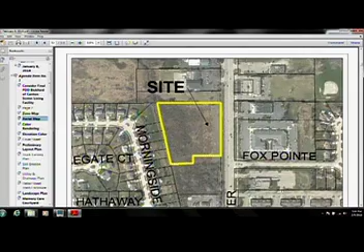The use is complementary to the medical uses on the Canton Center corridor and provides a use which is underserved in the Canton market. We discussed some of the traffic issues at the last public hearing. Traffic generation is projected to be less than typical office or commercial uses that can be developed on the site. This is the 5-lane section of Canton Center. The county, when they get a driveway permit application, will take a look at the geometrics for the driveway orientation and layout of the drive approach.

The building is a single-story brick and stone building with some siding, high-end architectural finishes. The project sponsors provided a brochure to you, which gives you an idea of what the building will look like in color, and some interior renderings of what the rooms will look like in the assisted living facility. It will be very nice, a good fit for Canton, serving our aging population and their families as our demographics change. Mr. Eby is here today to answer any questions on the final plan development, but otherwise it's pretty similar to what you saw back in October, November of last year, and staff would recommend approval of the final PDD.

Thank you, Jeff. I noticed they even let us know what the bus looks like. It's quite extensive.

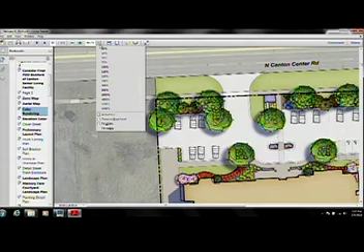Along the northern boundary of the property there is what I'll call a conservation area, a designated wetland from a previous development that will perpetually remain green. So we have that 50-foot green buffer, which will make it seem more open. Also, to the rear of the property, we have Fellows Creek with its extensive vegetation, which will help serve as screening.

There is an emergency lane that was required by the fire department to access all sides of the building. On the next page, I have blocked out where the subsurface detention is.

That was a question brought up at the last meeting—what is subsurface detention—because it's a new way of managing stormwater runoff. You can see the area of our parking lot where that subsurface detention will be and how it will discharge into Fellows Creek.

On the next page you see illustrations showing what the stormwater detention basins look like. They're basically large pipes that store the water temporarily and then slowly release it at a controlled rate into the creek.

On the next page, we also have the end sections where it will discharge into Fellows Creek. We also show the vortex separator, which helps remove sediment and debris—it's a method of treating the water before release.

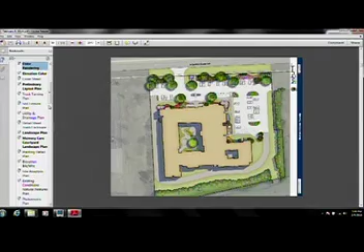The next page is a picture of our typical bus. We call it Howie. One of the questions—what's it called? It was an acronym for happiness, I can't remember what it stands for right now. You caught me on that.

One of the questions that came up last time was whether we would have an impact on the transportation system provided for many of your seniors. We addressed that—this is about a 15-passenger bus that is handicapped accessible, with lift ramps and so forth.

The next page is just a really neat shot—it's a drone shot of one of our buildings in Richmond, Virginia.

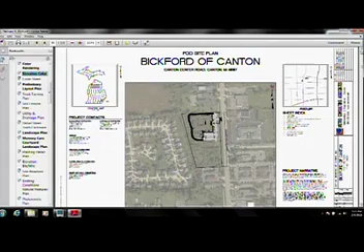On the following pages we have the two elevation views of what it would look like from Canton Center Road, then the northern elevation, showing the building along the north side next to Fraser's bike shop. The west elevation would back up to Fellows Creek and be partially screened—per Jeff's comments for architectural modifications, he's requesting additional brick and stone along the back side of the building, which we will comply with. And then we have the south elevation.

Sorry to interrupt—these are actually photos of similar buildings rather than a model of this building? Yes, a real one. Okay, right, because I'm trying to make sense of the plan and elevation versus the photos. Okay, thank you.

On the next page you see a variety of architectural elements that accent the architectural detail for the building—precast sills and lintels at the windows, shutters. Most of our building materials, the hard surfaces, are Hardie board, a cementitious board, very durable. The next is a photograph of resident rooms, what they would look like.

These are very similar buildings and are a prototype. We have two interior courtyards, one for the memory care area and the other for assisted living. The remainder are common areas shared by all residents, like the common living rooms, dining areas, the salon, and so forth. With that, I'd answer any questions you might have.

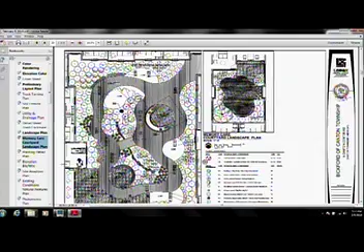Thank you. First question I have off the bat, is there a particular reason the roof lines are not shown from the overhead view? It's a minor point, because I know it's a residential-looking building and I can see the elevations. It's just that it would be nice to see the look of the building in terms of the roof lines—it looks like a flat roof building. That's a good question. No, they were not included. The pictorial you're speaking of was actually generated by the landscape architect, so he was more interested in the landscape details.

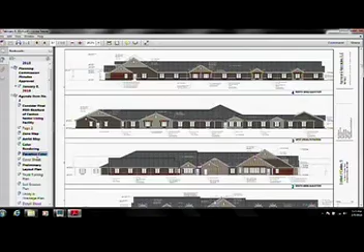Looks like a very nice building. Before we go to the commission any further, I'm going to ask if anyone in the audience would like to speak on this, since it is a public hearing. Any comments, questions, anything at all on this project? And if you'd like to borrow a packet and look through it, be happy to share that with you.

No? I move to close the public hearing. Got a motion to close the public hearing at 7:14 by Commissioner Zuber, supported by Commissioner Perkins. All in favor, say aye. Aye. Any opposed? Okay.

We're going to start down at this end and ask—actually, any questions or comments for Jeff?

So I noticed this looks like a couple of our other seniors' places—are we trying to keep the architecture the same? It looks like Heartland on Lilley Road. I noticed you said it matches the Canton Center corridor, but— Well, I think when you deal with a one-story building, you're going to get a similar look. They're adding gable features, and they're all a little bit different. I think recently we've seen a lot of stone accents on these buildings, which we didn't see 10 years ago—that's just more current in architectural design today. He's also got overhangs on the windows and copper elements over the windows, which we haven't seen on other buildings, and that gives it more shadow lines and dimensionality. So, you have a large institutional one-story building with a roof line—there's only so many different ways to decorate it, I guess.

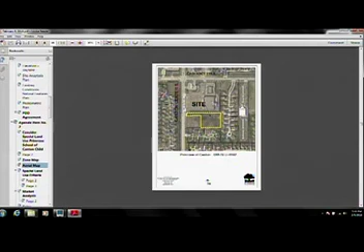The site will be provided access to Canton Center from a private road utilizing the existing curb cut as shown on the plan. You can see a flag parcel there that exists. Essentially this area along the north side, just south of Bush's, will be the private road, so the daycare will be on the east side of that. There's a small office parcel that'll be retained in between the Canton Center pad, which was originally a bank site that was sold off, and a future office building. This will be split off when they bring in a site plan with a private road approval.

Basically, the daycare center has to meet certain guidelines when it's adjacent to residential. They have to meet a certain setback from existing residential. They have residential abutting them to the east and to the south. They have to maintain setbacks to the playground area and other buffer yards for the daycare center, and they have to meet a certain size playground to serve the children that'll be going there, by our code and by state code.

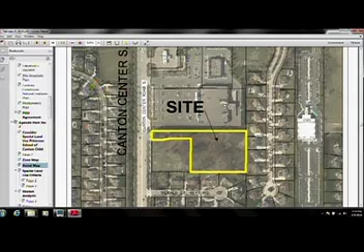The preliminary plan meets all of the site design requirements for a daycare in our code, including the setbacks and buffers. It's a one-story brick structure, very residential in nature, almost 100% brick. I think they have very little other than the gable ends that are sided, so it should fit in nicely with the neighborhood, which are mostly two-story houses to the south, west, and east. So staff recommends approval.

They meet all the general criteria. I didn't include all of those in my staff write-up. I've attached their responses to the special land use criteria in your packet, so it's self-explanatory, but they do meet all of the general criteria for special land use and the specific criteria for daycare centers, and staff would recommend approval.

Thank you, Jeff. Is there staff or project representation here? Yes, we have Metro Consulting, our township engineer, if you want to come to the podium. Welcome, Candace.

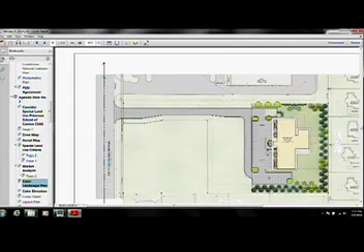I noticed that you've designed the play areas, the outside play areas, towards the rear, which back up to people's backyards. Do you anticipate a lot of noise and commotion from the kids and stuff? I mean, those residents there have been used to peace and quiet for a lot of years.

Our code requires a 75-foot setback to any adjacent residential building. So they've maintained that setback. They also have a 30-foot wide landscaped berm, 4-foot high berm, and then there's a fence on the inside of the berm to enclose the playground area itself. So we changed our code quite a number of years ago due to noise issues when daycare centers had their playgrounds adjacent to residential. Since we've done that, we haven't had any complaints.

That's all the concerns that I had. Anything further from the commission? Make a motion. Go ahead.

I move to recommend approval of the request for special land use for a child care center on part of parcel number 086990002-701 as proposed.

Commissioner Zuber has a motion on the table, and it's been supported by Commissioner Perkins. Any further discussion on the motion? Commissioner Zuber, would you call the vote, please?

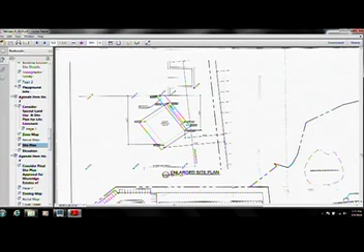David Garvey has provided an additional statement, in addition to the original, answering the additional application background questions regarding the days they're going to be using it, how often, and the nature of the use. We've got both David and Steve Garvey, I think they're both Eagle Scout candidates. This is part of their Eagle Scout project that they want to do on behalf of the church. They're raising money to build this thing and put it in. I'm going to let them explain what they're doing and answer any questions you may have.

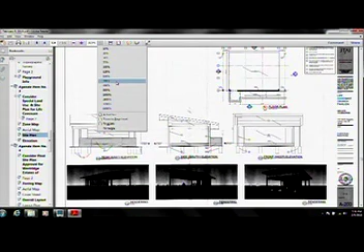Welcome, how are you doing today? Good. My name is David Garvey, Steve Garvey, and we are working on our Eagle projects just outside the area by Life Church. We call it the Green Space, where we'll be putting in a kind of pavilion band shell as my project. For my project, I'm having 3 recreational areas: a sand volleyball pit, and 2 others that are kind of hard to explain. Sand volleyball pit, and then 2 other recreational areas that are different activity games that are a little hard to explain. Sounds like a worthy project.

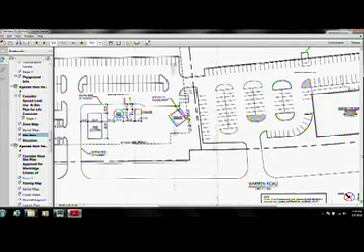You're going to be building all of these as part of your project? Okay. So in the warmer months, it would be for like an 8 to 10 week period, on Wednesday evenings and Saturday evenings. So it'd probably only get like 20 uses a year. It's a pretty light load per year, but we expect it'll be used for many years.

The residential area is more this way, so it's pointing more toward the road than the residential area. But since we'd want to have people in front of the pavilion, we wouldn't want to point it at the recreational areas, because I have people sitting in front of the band shell in the green space.

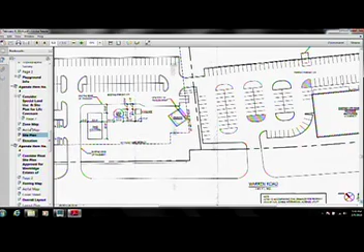We're really adjacent to Yazaki, right? Yeah, the closest neighborhoods are off of Old Haggerty, to the west of Warren Road, south of Warren Road, west of Old Haggerty. I don't look at that as a real big problem. If you go to the aerial, Copper Creek is probably the closest. How far is it from the residential area? Let's enlarge this a little bit. So this is the green area here, the band shell's here, the nearest residential is way over here off of Old Haggerty, so probably a couple hundred yards, across the parking lot from Yazaki.

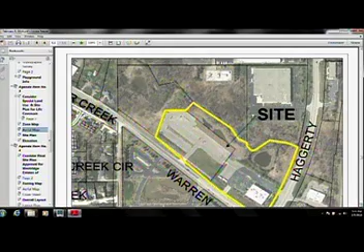That's a big deal, and I know you've worked very hard on this. Tell us a little bit more about why you chose this project and what it means. We're part of the youth group at Life Church, so it's something that'll impact us, our friends, and the future middle schoolers and high schoolers coming through. The young adults group will also use it eventually. It's something that affects us and our friends and will be a positive impact for our church and community.

As far as becoming an Eagle Scout, that's a big deal. It's something we've worked on for a long time, going through the ranks, and it's been a great experience for us.

With our youth group, every week we bring out a pavilion, and we have a temporary nine square in the air and a temporary volleyball court. So with the permanent ones, we wanted nicer courts so they could stay out there and we didn't have to set up a tent.

We're not Eagle Scouts yet, we're Life Scouts, and this project is the central point of becoming an Eagle Scout, which is the highest rank.

Part of this has to do with planning the project, raising the money, getting volunteers to help build it, getting contributions and building materials, all of those kinds of things. We've been working with an architect who worked on some of the stuff at the church when we renovated it. So it's a lot of leadership skills and fundraising and learning about management and the zoning process.

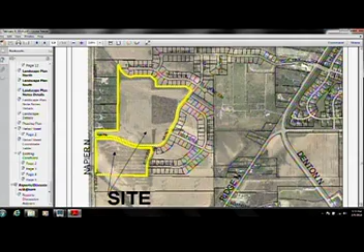Over 1,000 trips a day then? In accordance with their traffic study and Wayne County's evaluation of the road, they said no. At some point in time it may, but then it'll have to be on Wayne County's dime to take care of it. Wayne County evaluated the traffic analysis just like we did - they did a specific analysis of the assumed number of trips utilizing that road when they came in. I guess if conditions change and more of their residents start using Napier Road, then it'll be a problem, just like Ridge Road has been in the past. But if there's no deficiencies at the time the development comes in, we can't require them to do an off-site improvement that they aren't contributing to.

Had a lot of issues with Ridge Road recently, and it ended up on our dime to pay for it. Right.

Anything else? Well, I think then it calls for a motion.

I move to recommend approval of the site plan for Phase 3 of Westridge Estates of Canton Site Condominium on tax parcel number 0699900100702 and 0699900100703, as proposed, subject to the provision of the required financial securities prior to review and approval of the Township Board.